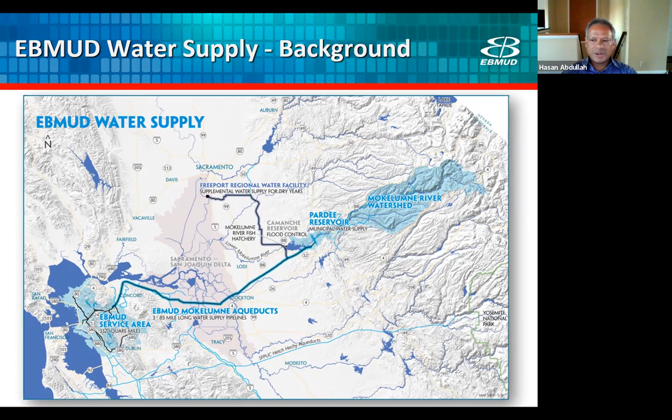As I was saying, 90% of our water comes from the Mokelumne River, 10% from East Bay watershed, where we have several reservoirs within our service area. But during droughts, these two supplies cannot support our demand, so we have to get water from a second source or intake, which is Freeport. We get Central Valley Project water, that's federal government contract water, or water transfers that we have to purchase from local sellers, other agencies in the Sacramento region.

Before we go on, our general demand, depending on the year type or season, varies between 120 million gallons a day to 220 million gallons a day. Just to give you an idea, a person generally uses about 100 gallons a day, both indoors and outdoor, roughly 50% each. So 1 million gallons serves about 10,000 customers per day.

This is what our Pardee intake looks like on a normal and good year. There's plenty of water, very high quality. That intake connects to our aqueduct, which brings the water to our service area.

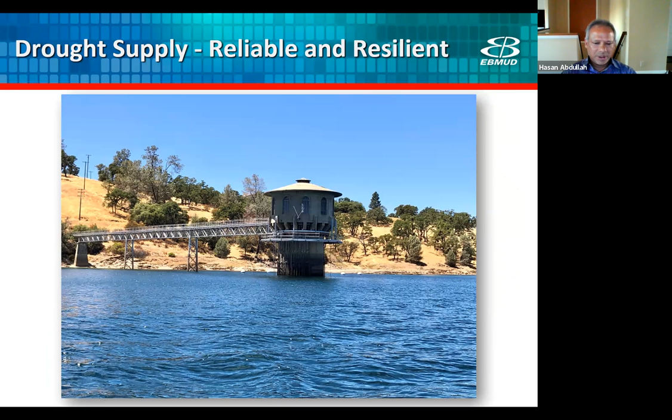However, during droughts, it does not look as pretty. Next slide. This is how it looked during one of the worst droughts we had, 1977. All our work is focused on avoiding a situation like this.

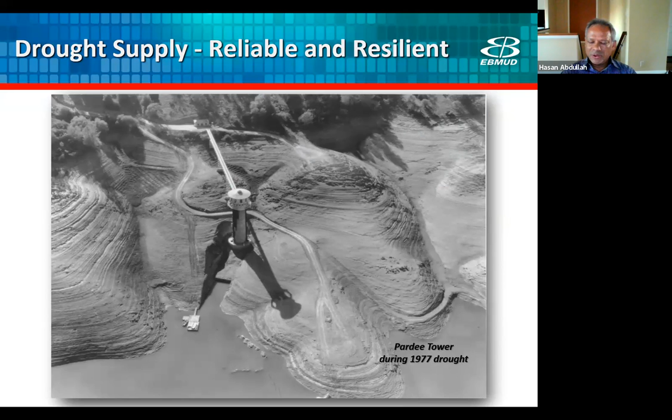Our group division works on water supply and supplemental water supply, and we never want to be in this kind of situation. So we've developed a water supply portfolio that will guard against this. Next slide.

This is our current water supply portfolio. The dashed line marks the projects that are already in place. Above that are projects we've got in place or are working on currently. Below the dashed line are future projects we're currently working on that may be brought online as they become completed.

Our first line of defense against drought is water conservation. Our customers have been great this year. As you know, we are in a drought, and they've been saving almost 15% of their demand. Our goal is to achieve 70 million gallons a day by 2050.

Next project is recycled water. We currently have about 9 MGD supply from recycled water, and we're planning to increase that to 20 MGD by 2040.

The third one is water transfers. Currently we are buying water from Placer County Water Agency, using the Freeport intake to bring it into our service area. We are also working on groundwater, desalination, regional partnerships, and increasing the Los Vaqueros project. Next slide.

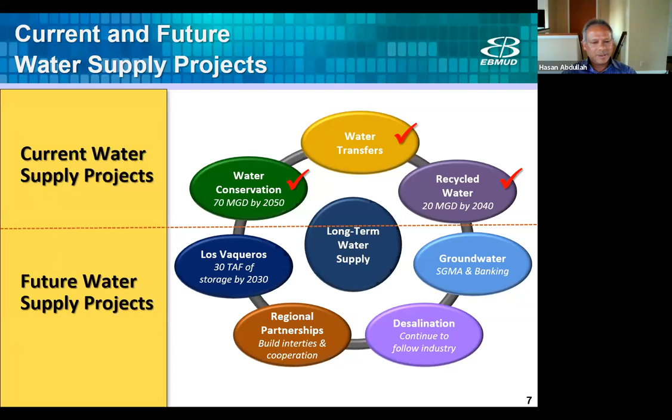All the desalination plants within the US use membrane technology. It uses the reverse osmosis process, which is basically a very high quality, efficient filtration process. The way it works is the reverse osmosis screen has very, very fine holes in it. You add seawater on one side and add pressure to push just pure water across the screen to the other side.

These holes, the screens, are so fine that they only allow water molecules to go through. It keeps all the salt on one side and produces pure water on the other side. Because it's so fine, it takes a lot of energy to push that water through the screens and produce clean water. That's one of the issues we have with desal—it takes energy. The higher the salt content of the source water, which is highest for seawater, the higher the energy need for that process.

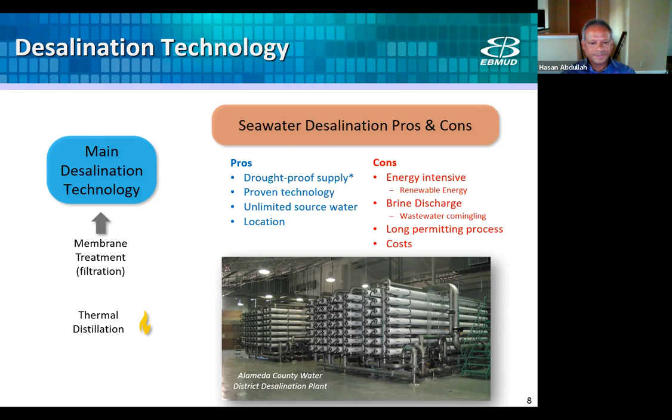As I mentioned, desalination has been around for a long time. It's been used all over the world. Mostly the largest plants are in areas where it's either dry or has severe droughts, like Australia. In the US, the largest plant is located in Carlsbad. It was commissioned several years ago. It produces 50 million gallons a day, and it's working very well, producing higher than 50 most of the time right now.

The cost for producing desalination water at Carlsbad is around $7,400 to $8,300 per million gallons.

These are some of the local desalination efforts. Antioch, I'm going to go into that first. It is being done by the City of Antioch. They are furthest along, they're in construction right now, expecting to finish at the end of 2023. Because it's located inland within the delta, their source of water is brackish water, which is less saline than seawater, and their production rate is quite efficient. They will be producing 6 MGD out of 8 MGD that they're taking in, so a 75% recovery rate.

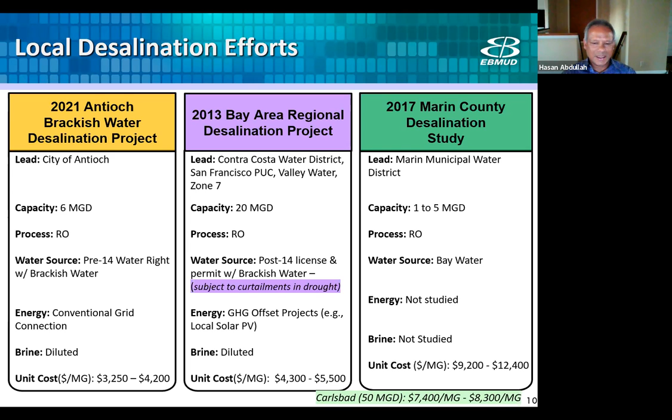So this is more information on the Bay Area Regional Desalination Project. It's a joint project between 5 Bay Area agencies. We started working on it in 2003, 2004. We did a quick pre-feasibility study to see whether it makes sense or not. It did. We moved into a feasibility study, which was half funded by the state and half by the 5 agencies, so the formula worked really well. That found that it is feasible.

We moved on to a pilot study at the East Contra Costa location. That pilot study completed in 2011. Technically, it is viable, practical, and we got some design information on how to build a desal plant at that location. But that pilot study showed there were certain issues we needed to tackle, including greenhouse gas, fisheries impacts, and brine discharge impacts, and so on.

So we did some of the analysis. We completed that analysis in 2013. Then the decision point came in 2013 whether to start this project or initiate CEQA. 2013 was a drought year, and we had certain other considerations, so we decided not to initiate CEQA.

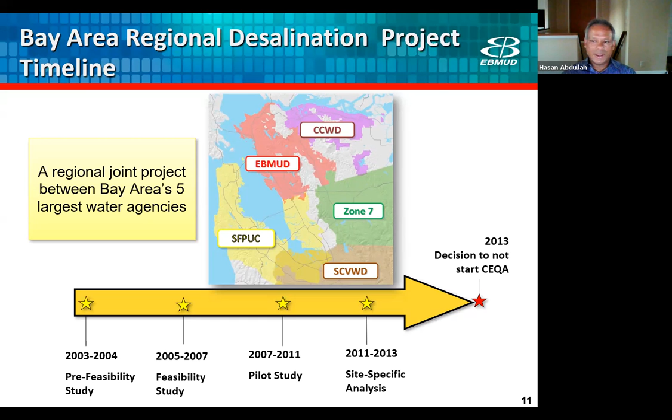Background information: we looked at 13 sites and filtered it down to 3 possible sites - East Contra Costa, Oakland Bay Bridge, and Oceanside. They're all near a wastewater treatment plant, so we can commingle the brine discharge. That was the point. We then chose the East Contra Costa site for further study and pilot testing.

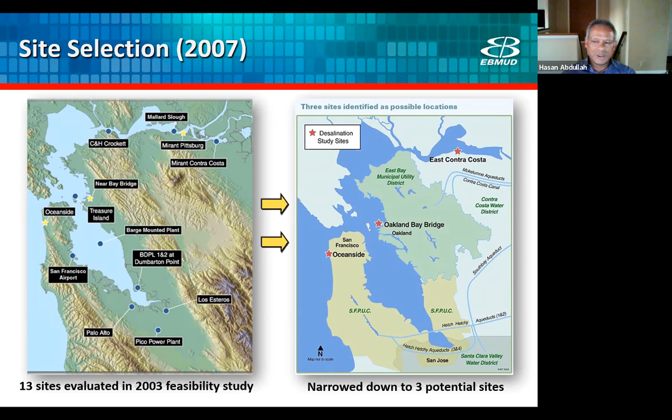The reason we chose the East Contra Costa site was that it had brackish water, so it uses less energy. There was already an intake owned and operated by our partner, Contra Costa Water District, which included state-of-the-art fish screens, so it's all permitted. We could just put our pilot desal facility next to the intake and do the test.

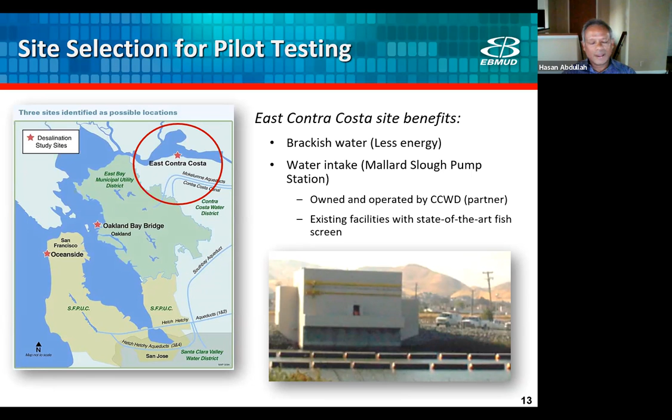What did we find from the pilot test? It was technically feasible, with a very high recovery rate of 80+%. Typically, seawater desalination recovery rates are around 50%.

During some periods of the year, there may be sensitive species present in that area, so they may be impacted if we pull in water during those times. For brine toxicity, we did lots of tests, including exposing local species to pure brine without any blending, and there were no effects. Costs were anywhere between $4,300 to $5,500 per million gallons.

That's how much it would take to produce the water. EBMUD would get direct delivery, as would Contra Costa, so that's the cost to us. And that includes securing energy through renewable energy - that cost is embedded in the treatment production cost.

However, some of our partners are further away, like Zone 7 or San Francisco PUC. It would take another $1,300 to $1,500 per million gallons to deliver the water to them.

The biggest problem we have was that because it's inland and within the delta, we needed to use water rights, and Contra Costa has that water right. However, during droughts, that water right could be curtailed, meaning cut by the state. They may not allow Contra Costa to use that water right to pull water for the desal plant.

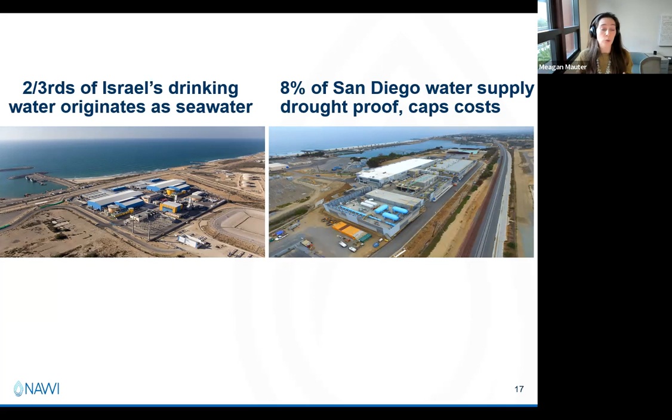We also have desalination here in the US and here in California especially. There's a Carlsbad desalination plant in Carlsbad, California, that provides San Diego with 8% of its water supply. Unlike the Israeli case, where the vast majority of water is provided through desalinating seawater, in San Diego it's a much smaller fraction, but the advantage is that it's drought-proof. The second advantage is that it caps the costs of water on the open market. So there are financial reasons and climate resiliency reasons to pursue desalination as part of a broad water supply portfolio.

But I think that both of these examples have opened the question about whether desalination is relevant beyond these wealthy coastal communities, and really how a whole swath of the US might tap desalination technologies to secure their water supplies.

The argument I want to make today, briefly, is that desalination is not just a technology for tapping seawater. It's really a technology for tapping a whole host of different non-traditional waters. In particular, it allows us to tap wastewaters and other water sources that we've typically discarded to enable a circular water economy that is low cost and also delivers low carbon water supplies.

I'm very fortunate that I don't have to give this talk in its entirety. The third speaker is Jennifer Stokes-Draut, who is also a member of the National Alliance for Water Innovation and a key lead in assessing the decarbonization implications of seawater desalination. So I'm going to let her talk a little bit more about that low carbon element.

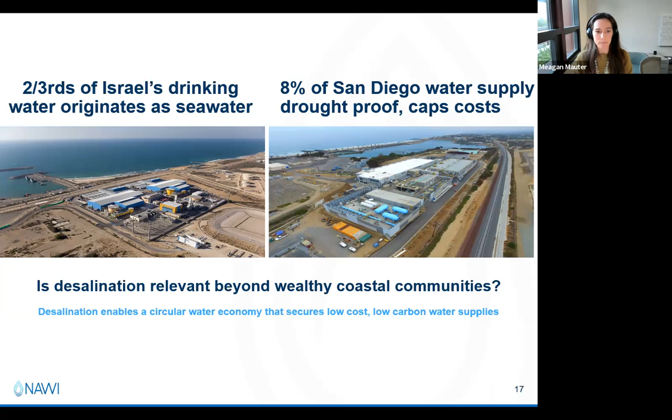Next slide, please. So I'm certainly not unique in thinking that it's important to apply desalination technologies to a broader set of non-traditional water sources than just seawater. I think the environmental engineering and water treatment community widely recognizes that securing water supplies across the US is actually going to require us to tap municipal wastewater, agricultural wastewater, industrial wastewater, and even quite impaired waters, things like oil and gas produced water and stormwater.

So the EPA has a water reuse action plan that came out last year and has done a lot of work trying to quantify the magnitude of these non-traditional source waters and where we might use that treated water beneficially. That doesn't necessarily mean we're going to use this water for drinking water supply, but it might offset water demand for cooling, for instance, or we might see on-site reuse of industrial water instead of taking water in manufacturing processes, using it, and then discharging it either to the environment or to a municipal wastewater treatment facility.

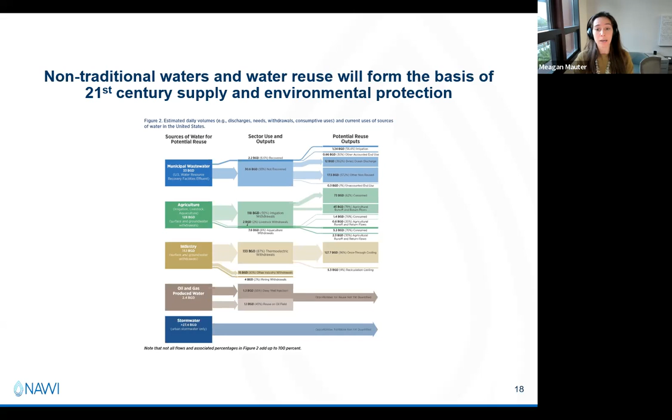Okay, so I will say, though, that while we have some great technology, things like reverse osmosis, which were highlighted in Hasan's presentation, but also are very core to the technology deployed in Israel and here in Carlsbad, there's still need for lots of technology innovation to make this vision of a circular water economy possible. And in particular, I think we're going to need innovation that is very specifically focused on the source waters that we are trying to treat.

Next slide, Catherine. Right, so NAWI is really set up as a sort of early stage technology development organization that is trying to focus on reducing the cost and energy intensity of non-traditional source water treatment and desalination.

And so we needed to prioritize where we would invest our research dollars. We did an early survey of the energy intensity of a whole host of different non-traditional water sources and really learned two things. The first is that the energy intensity of treating these non-traditional waters is often three orders of magnitude higher than it is to treat a traditional freshwater source. So there's going to be significant increases in the cost and energy intensity of treatment itself.

There's also a lot of variation among the different non-traditional source waters we might tap. You'll notice I haven't plotted the absolute energy intensity, but the relative energy intensity, normalized to the thermodynamic minimum. The thing you need to know, and I think Hasan explained very nicely, is that the absolute energy intensity is going to increase as the salinity of the feed water increases.

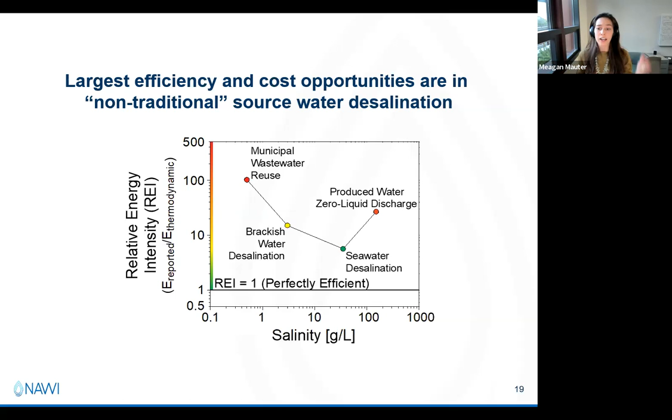The second realization we had as a team was that the energy intensity of water is a very strong function of conveyance. We think about water as being supplied in three steps: the first is transmission, taking it from the source to the treatment facility; the second is the energy embodied in treatment; and the third is the energy embodied in distributing that water from the treatment plant to individual users.

It's actually very high in places that are hilly. So when we think about Northern California and coastal California especially, we often find we're spending as much energy to distribute water to high elevation service areas as we would to desalinate that water.

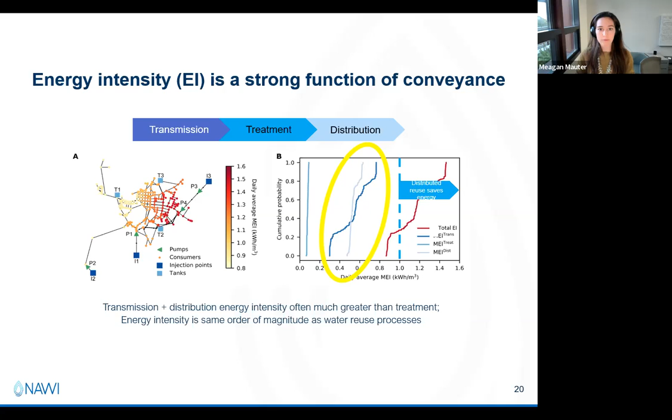So this set of revelations, that it made sense to focus on non-traditional source waters other than seawater, and that distributed desalination was going to be important because of the energy embodied in transmission and distribution, led us to a hypothesis as a research organization.

And that hypothesis was that we see declining treatment costs as you increase the operational scale of a facility. You get economies of scale in treating water. Next, Catherine.

But we have diseconomies of scale when we're transporting water. As I just showed you, the further you're going to transport water, the higher you have to pump it, the higher the transport cost is going to be. And so what we see is that today's plant sizes tend to be built around 50 MGD or so, which is cost optimal for current plant designs.

But our hypothesis is that we're never going to be able to change the amount of energy it takes to overcome gravity. Water is heavy and gravity isn't going anywhere. What we could do is dramatically lower the cost of water treatment. Catherine, if you could click forward a couple more slides.

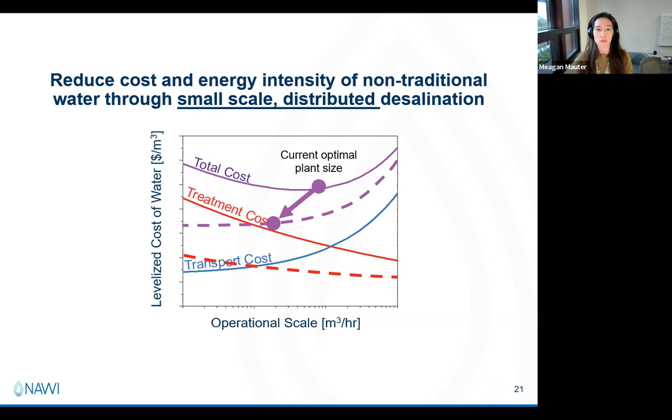Just in summary, our hub has a couple of key mission areas. At a very broad level, we are aiming to secure water supply through energy efficient and cost-effective water desalination.

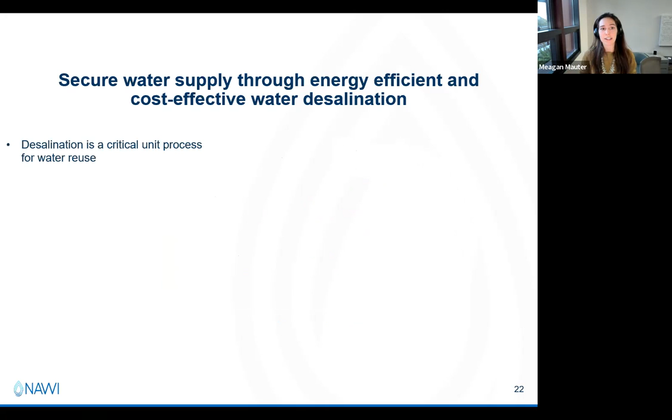We believe that desalination is a critical unit process for water reuse. We also believe that there's a diverse set of non-traditional water sources, both natural and wastewater sources that can be desalinated and reused. This includes seawater and brackish water that Hassan mentioned earlier, and then municipal, agricultural, industrial, power, mining, and oil and gas sources as well.

The key, though, is that the technology innovation to get us there isn't fully there for small scale systems. Those cost reductions are going to happen through innovation in six key areas: autonomous, precise, resilient, intensified, modular, and electrified desalination systems that are small scale and readily deployable.

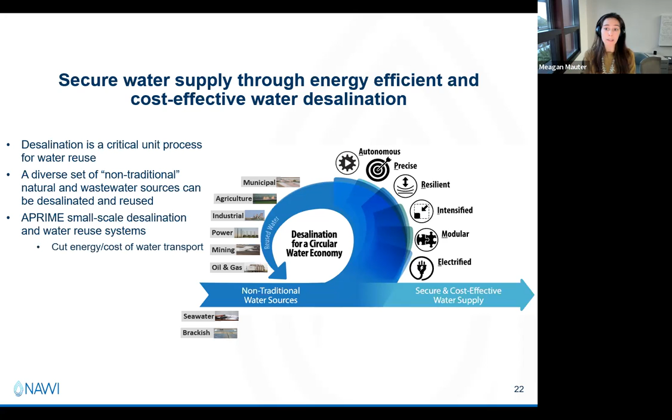We believe that if we can achieve an A-prime system, we'll see significant reductions in the energy and cost of water transport, that will allow us to achieve cost reductions through modular and manufactured systems, and that will also achieve cost reductions because of reduced time to deployment and increased supply resiliency.

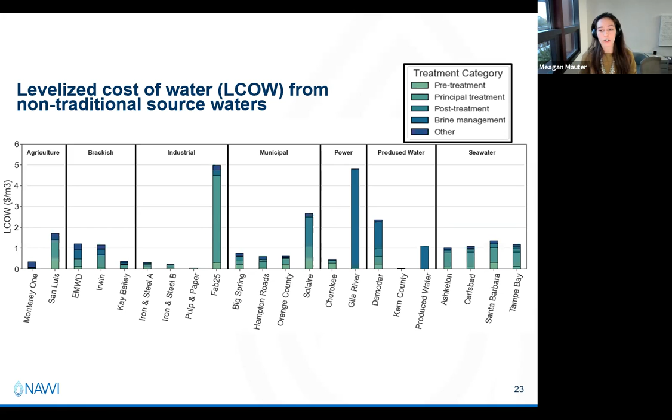Catherine, you can keep going forward a couple more. I want to end simply by saying that we've also done a lot of work in assessing what the actual costs of these small scale systems are. And what you'll notice is that there's a wide variety, or wide distribution, of costs today. These are today's costs, but we are really aiming to develop a set of technologies that would bring these costs down quite significantly. And I'll turn that over to Jen in the next presentation.

I'll just go through these a little bit more quickly and say that Jen has been really instrumental in helping us publish these baseline studies for those costs and some technology roadmaps for how to get us there at a sector level. So with that, I'll conclude and pass it over to Jen, who I think is going to chat a bit about the carbon implications of desalination.

Okay, thank you so much, Dr. Mauter. That was super informative. We really appreciate that. So let me just introduce our final speaker today. So you queued her up quite nicely, but I'm going to introduce Dr. Jennifer Stokes-Draut, who is so appropriately named, right?

Dr. Stokes-Draut studies the economic, energy, and environmental implications of infrastructure systems at Lawrence Berkeley National Lab and UC Berkeley. She focuses primarily on innovative water systems, specifically evaluating trade-offs and synergies between conveyance, treatment, distribution, and management of potable water, recycled water, wastewater, and stormwater. She is also interested in understanding the interdependencies between water, energy, and agriculture and how they will be affected by our changing climate. She is currently serving as the deputy lead for the National Alliance for Water Innovation's Data Modeling and Analysis Research. Jen has a bachelor's in science from the Georgia Institute of Technology and master's and PhD degrees from UC Berkeley in civil and environmental engineering. So with that, Jen, I'm going to turn it over to you.

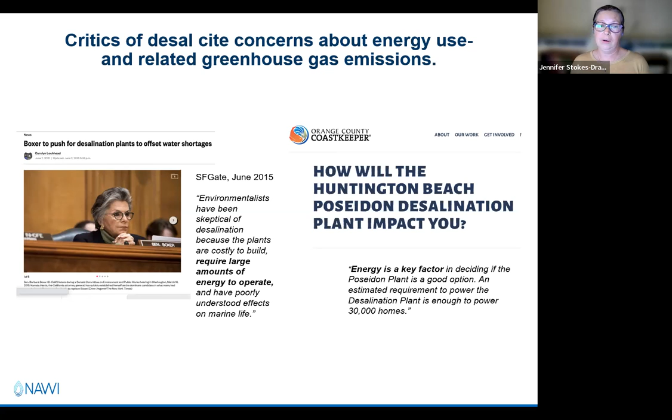Next slide. And these are real concerns. Desalination does use a lot of energy. Megan already told you a little bit—it just takes more energy to get salt out.

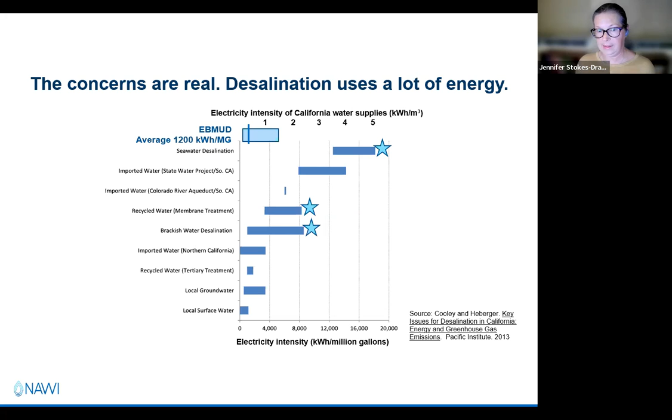Next slide. For reference, EBMUD's water supply, on average—some research out of UC Davis determined that on average it takes about 1,200 kilowatt hours per million gallon. But depending on where you live, at the bottom of the hills or the top, for a particular customer it can really be anywhere from 400 to 5,000. So more than an order of magnitude difference, depending on where you are. And also, as Megan alluded to, that top end is in the range of where you see desalination processes' energy intensity. It's a similar amount.

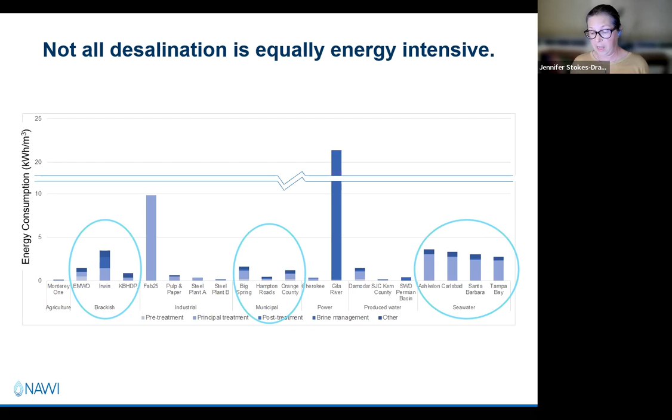Next slide. The three of these that are relevant for urban areas like EBMUD are: on the left circle, brackish water, which varies largely based on quality and how you dispose of the water in the end. The middle one is municipal reuse, so reusing wastewater—these vary depending on how the water is used by customers, and some of the treatment processes can impact how much energy is used. And then that last set is seawater desalination. Those tend to be closer together and more similar in how they use energy, largely because we've just spent a lot of time optimizing those systems. Next slide.

We do expect that for seawater desalination or reverse osmosis, that's probably going to flatten out. There's not that much additional potential to make that more efficient, but we have a lot of potential for these other water sources, as Megan said.

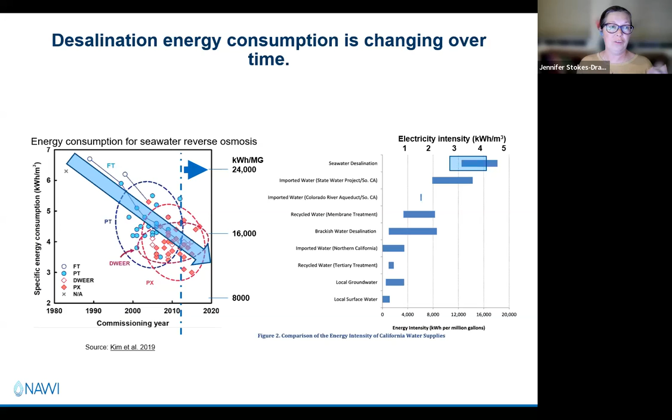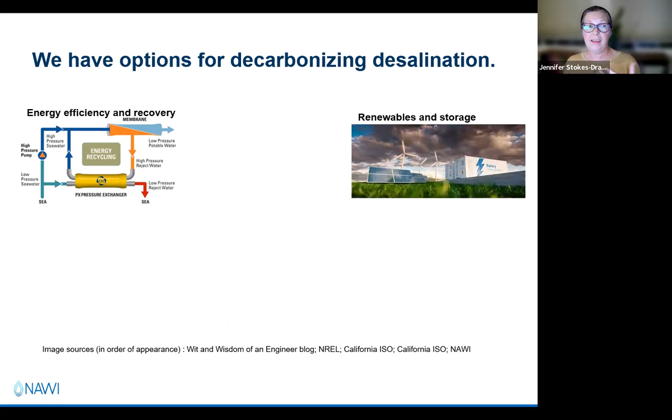We can do more renewable energy than even the grid would allow us. Hassan said that in EBMUD's plan, they were thinking about using purely, like investing in their own renewable energy. That would improve that performance dramatically.

And the last thing is that there are these other innovations that Megan alluded to that NAWI is focused on that could contribute to decarbonization. I'm not going to talk about all of them, but we are looking at ways to make systems more autonomous so that they can respond automatically to things like demand response, to prevent failures in the system, so that we can operate more efficiently and in a more optimized way.

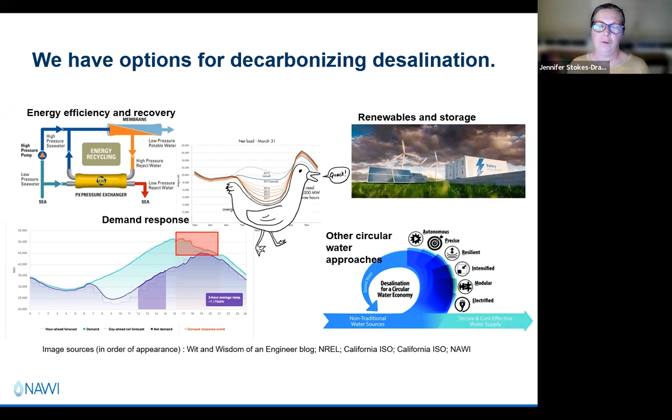Next slide. That is it. My final statement: are desalination and climate change friends or enemies? I think they're maybe still in the frenemy range at the moment, at least for the conditions that EBMUD is looking at, but I think the future is potentially very bright. Well, hopefully we can put desalination in the friend zone at some point.